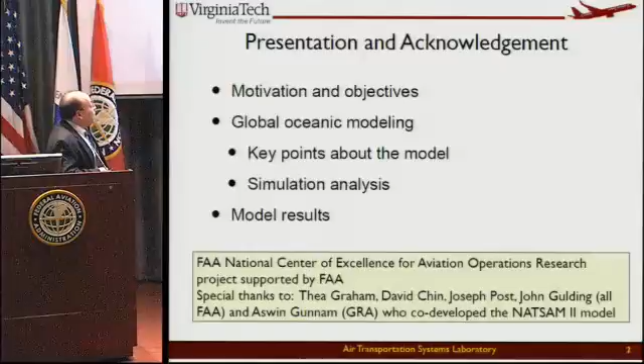So the presentation here covers the motivation, and then we show you some of the simulation results.

As Arnie mentioned, the aviation system is very safe, but there are about 500,000 flights every year, depending on how you count, that cross the oceans, whether Atlantic or Pacific, originating or ending in the US and other parts of the world like South America, Canada, etc. Measuring the benefits of advanced technologies in oceanic airspace is something the FAA is very interested in, as well as other air navigation service providers like NAV Canada, NATS UK, and others. The objectives were to develop a model which really started as a validation of another model, but then the model took an organic form of its own.

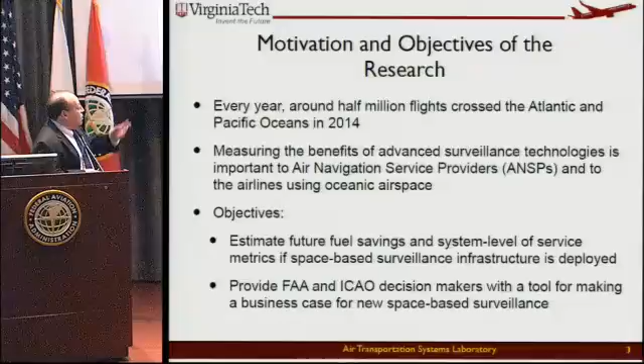The idea is to estimate fuel savings, travel times, and other measures of level of service that we can infer from oceanic capability that will be deployed in the future if more precise navigation and surveillance is implemented. Again, this is a topic that both FAA and ICAO have great interest in.

Here you see this is just for the Atlantic region. These are examples of the number of flights that cross the Atlantic every day in the organized track system - depending on which day you pick and how you count, maybe somewhere between 500 to 600 every day in a 24-hour period. However, there are a lot more flights in the South region which are not flying the organized track system. These are called non-OTS flights in my presentation.

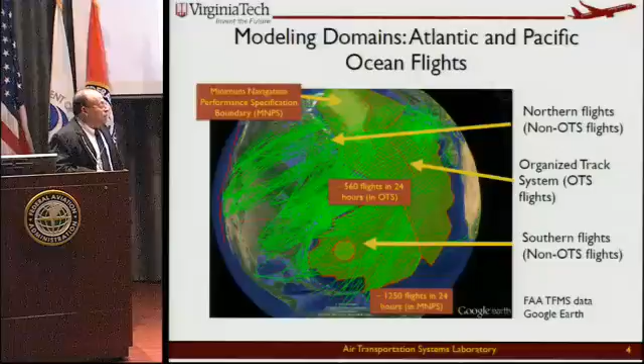Similarly, you have flights from the West Coast to Europe. Those flights typically follow non-OTS routes - they are user-preferred routes, and these are sometimes called random flights. So we are going to describe how we measure the benefits for each one of these types of flights.

These are some of the improvements we can get with better surveillance technology, like space-based ADS-B for example. You can reduce longitudinal separation in-trail inside the OTS. You can also reduce lateral separation between the tracks, and reduce lateral separation for non-OTS flights. With better surveillance, we can allow more planes to execute climbs, which during busy periods right now we don't see a lot of in the OTS.

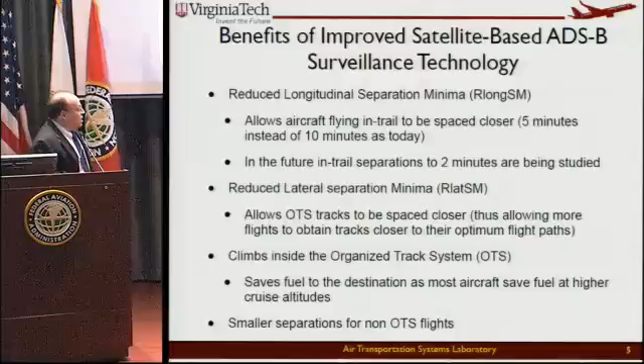The idea was to develop a model fed through real data, like TFMS data, or we can make our own flight plans. Because if you don't have data, or you're predicting the future and want to add 40% more flights than the baseline scenario, we have to predict the future, meaning creating flight tracks or flight plans ourselves. So we have a model able to do both - take TFMS data as well as do its own flight planning - and then inject it into a simulation model.

The simulation model uses the Eurocontrol BADA aircraft performance, tweaked because we have good data that Mr. Heimlich sent us from A4A - great thanks to the A4A folks for providing very nice data. Each box here shown in green happens to be a data input that the model uses in some way. For example, the A4A data is primarily there to calibrate behaviors in takeoff mass across the Atlantic or Pacific for those flights. This model is basically a numerical time-step simulation model, perhaps similar to TAAM or RAMS for those familiar with those.

We have conflict resolution and detection, but the model also has some components. If you look at the very center of this... I was using the pointer in the wrong way, excuse me.

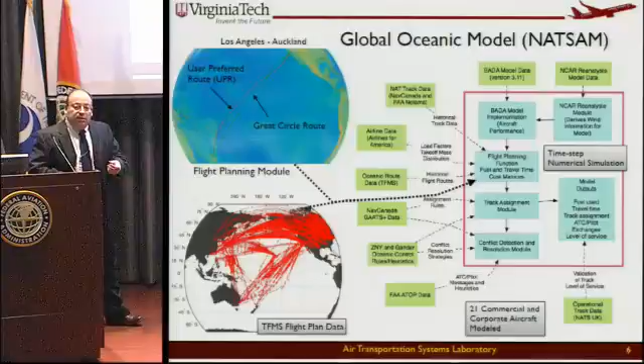So the flight planning function here, under flight planning, the track assignment is actually an optimization algorithm. This is the reason why we decided to develop this almost from scratch, because it's very difficult to do optimizations in existing models like TAAM or RAMS, where you will have to have a bus structure that passes parameters out of the model, do your optimization, and then feed it back. But anyway, let me give you some of the ideas.

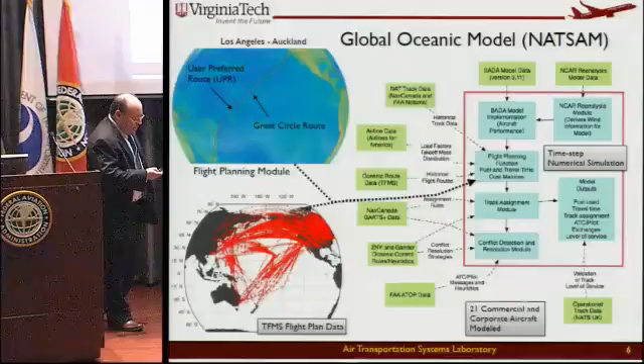So here we have an airplane flying over the ocean. We have some basic differential equations of motion for this aircraft, and we sample the position of the plane every 5 seconds. So every 5 seconds we recompute the fuel flow, put it back into these equations of motion to recalculate the mass. We also have behaviors in terms of the aerodynamic behavior of the aircraft, and then we can calculate distance, mass, and altitude, which are the state variables in the model.

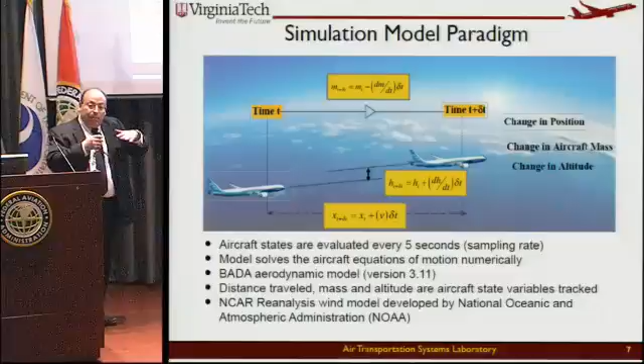Now, of course, if this vehicle encounters another vehicle and you have to separate it, then we obviously trigger some action, and you will see that we have some rules for that.

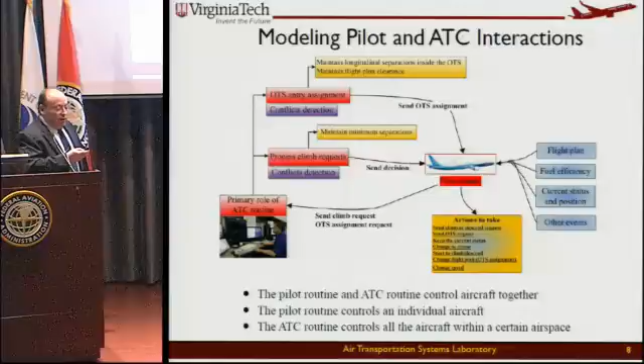We also have this model communicating behaviors between pilots and controllers, because remember, in oceanic areas right now there is a lot of data link communication that goes on. So part of the analysis we want to do is keep track of how many messages are being sent from the plane to the air traffic control people, and that way we can capture some perhaps precursor measures of workload, or, for example, count how many times the pilot attempted a climb and it was denied, perhaps due to traffic considerations and so on. So we have all that dynamic capture there.

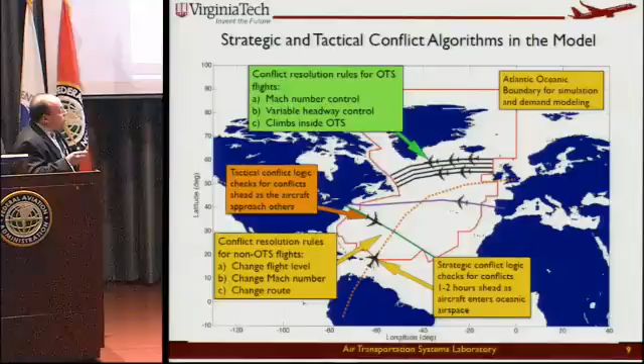Now, these are some of the things we have to explain, because the model really has two separate behaviors. The behavior in the organized track system is very different than elsewhere, because in the OTS you have a very rigid way of doing business. However, we use basically Mach number control and variable headway control rules, depending on your target Mach numbers, and we have to make sure those separations are going to be good. On the other hand, for non-OTS flights, we have more freedom, more degrees of freedom, and we can change flight level, change the Mach number, or detour the plane.

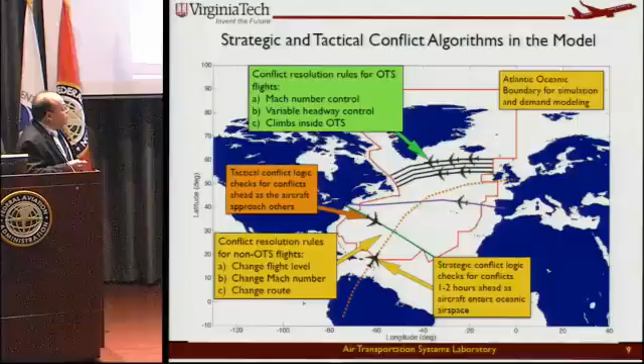Notice that we also have two conflict rules. One is strategic. As soon as the plane enters the oceanic area, as shown here for this flight that goes from Quito to London Heathrow Airport, immediately the controllers in the Oceanic Center, in this case in New York, will start querying this flight against other flights to determine if there's going to be a conflict ahead. Typically, sometimes those conflicts can be detected by the system 1 or even 2 hours ahead of time. However, because wind conditions are uncertain, as the vehicle approaches another vehicle, you have to trigger a tactical conflict and resolution algorithm. So in this model, we have both of these.

Let me show you some of the things that we produce. This model produces things like fuel consumption and travel time, since these are two key metrics. But we also predict what percent of the flights are going to be accommodated in the track and the cruise flight level that they are requesting in the organized track system. For the non-OTS flights, we can also find what percent of the flights get affected by these conflict resolutions, whether they are tactical or strategic.

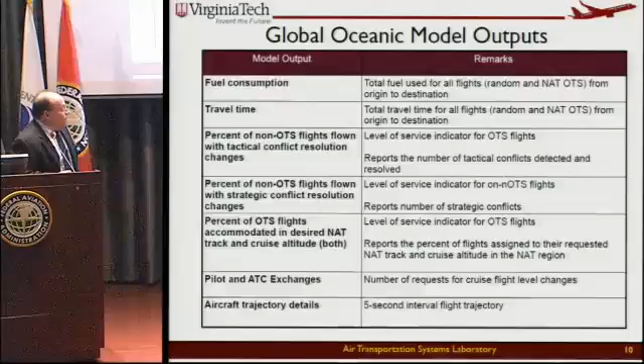So again, these are measures of performance of the system, is that right? So we want to do that. And of course, we can also track the number of pilot-ATC exchanges. For example, when the pilot requests a climb, and whether that climb is denied, we obviously log that in. And of course, you also get a flight trajectory that can be as detailed as every 5 seconds if you want it, perhaps for a safety analysis later on.

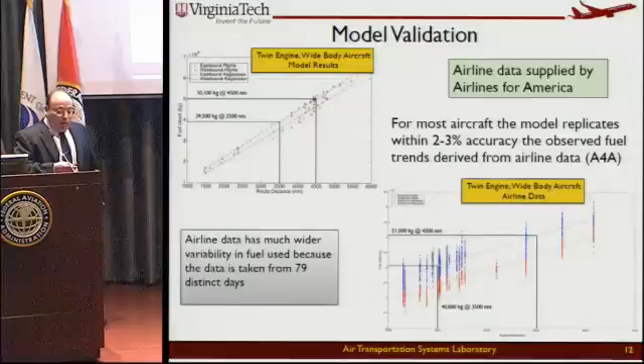Is this model really telling us the truth? Mr. Heimlich from A4A gave us very nice data that we can use to compare. Remember, we are still subject to the BADA model in terms of accuracy. However, it's nice to see, for example, when we model this aircraft—it remains unnamed, but you probably can make up who this airplane is, a twin-engine wide-body aircraft—this basically shows me the behavior of eastbound and westbound flights, and this is the A4A data. In general, we are within 2 to 3% of what A4A statistics show for those OD pairs that we collected. So that's good news.

Let me show you some preliminary results of these. I would put the caveat here that these are still preliminary because we continue tweaking this model. These are some of the assumptions that we made.

For example, in these results I'm going to present, we model both the Atlantic and Pacific Ocean flights. We are basically modeling 21 distinct aircraft, including new generation airplanes like the Dreamliner and the 747-8. We had 3 days of demand that we took from TFMS and injected into the model. We're using 2,000-foot hemispherical rules.

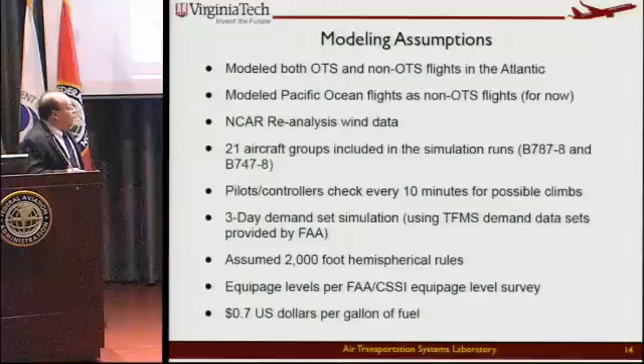I don't show the results in terms of dollars, but in terms of millions of kilograms of fuel saved every year. There's also some equipage level data here that was conducted by a survey done by FAA and CSSI some years ago, and I understand that is also being updated.

So here are some of the early results. This is for the Atlantic side. You see here the model—we ran the model for 3 days. That implies about 2,349 flights, including New York oceanic flights and also the flights inside the WATRS area. We basically see here the breakdown between tactical conflicts and strategic conflicts.

Right now, the model seems to be resolving a lot of these strategically, and again we have to go back to the actual data from ATOP to find out whether or not that is true. We visited New York Center, and we found that they are very strategic—they try to solve these conflicts very, very early on so that they don't have to worry about it for the next half hour or hour. So this is what the model right now is showing us.

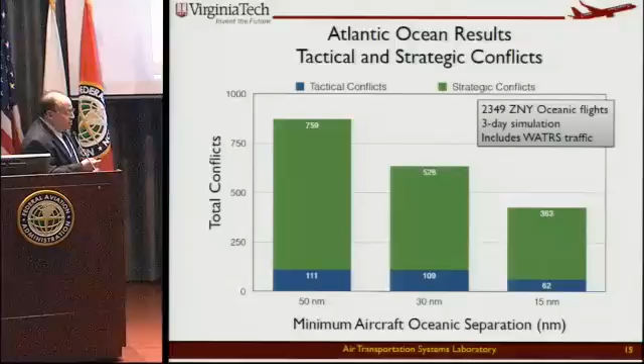Now, in terms of the tactical things that happen when you have to start making minute adjustments to Mach number, for example to deconflict 2 planes that are nearby, these are some of the results we see. Here we show 3 scenarios. Right now we assume the baseline: if you are not equipped in the ocean, you're going to be separated to a minimum of 50 nautical miles. If you are equipped, 2 airplanes equipped today could be as low as 30 miles.

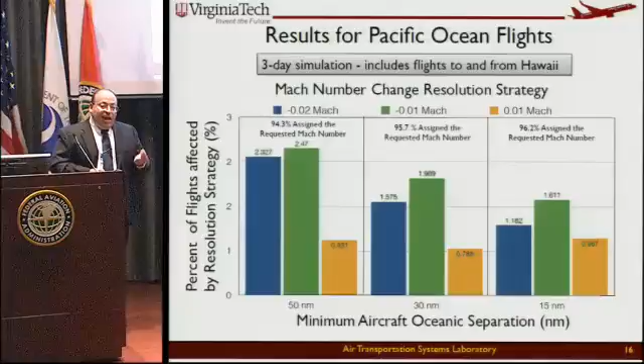Specifically, you want to take a look at these blue lines or the blue trend, because that happens to be the high—we changed the Mach number up to Mach 0.02 for most of these flights, that's the upper limit we put. If that resolution strategy doesn't work, then we have to do a lateral adjustment probably, because that would be more appropriate. A lot of these behaviors have to be calibrated against real rules that oceanic controllers will use. We visited the New York Center and Oakland Center to learn from them.

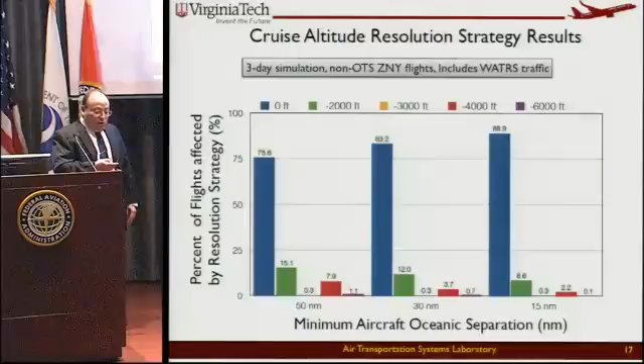These are examples of tactical resolutions, but here we're looking at changes in cruise altitude. In the baseline scenario, 76% of flights were able to stay in the altitude they requested. As the separation criteria is reduced, up to 88.9% of flights will actually stay in their flight level. This is a big improvement, and while it doesn't seem like much, in terms of fuel consumption it really pays off.

So here are the numbers, again preliminary. Looking at Atlantic flights, if we go from 50 nautical miles, the baseline separation, to 30, we get about 91 kilograms of fuel saved in the Atlantic, 81 in the Pacific. These numbers aren't exactly twice each other because these conflicts are fairly random. For Pacific flights, which are fairly long, you get a gain of about 173 kilos, that's about 400 pounds per flight.

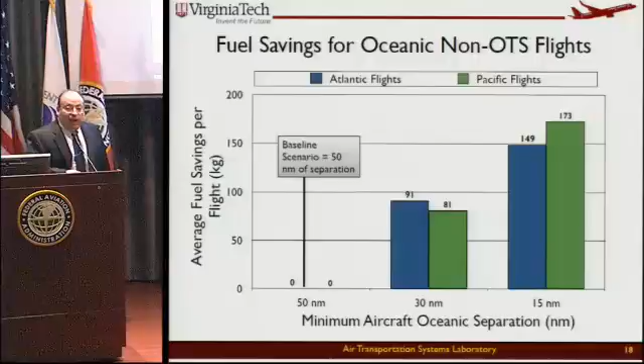Now the question is, how much is that? These are greenhouse gases, by the way, that we calculate as a multiplier of the fuel. Now, what happens in the OTS?

In the OTS, we examine the situation by looking at these headways between flights. When there is an opening like shown here, if there is a flight below that wants to climb, that flight is able to climb if it satisfies certain dynamic rules.

Another reason this model is slightly different than TAAM or RAMS is that every time a cruise flight level change is made, we recompute the fuel burn all the way to the destination, so we have a pseudo optimization for every flight. That takes a toll. This model takes about 6 hours to run on an i7 machine right now with about 2,300 flights over 3 days, which gives you an idea of the level of computation involved.

In the OTS, we factor that if we could reduce the separation criteria to 2 minutes in trail, which is a very aggressive target, allowing climbs in the OTS, we could see a benefit of about 158 kilograms.

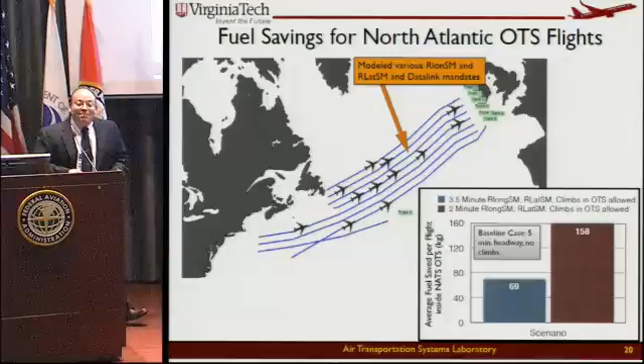By the way, I put everything in metric here because I was told, even when I was an undergraduate, that FAA was going to go metric 25 years ago. So I'm trying to contribute a little bit to that effect. We'll see.

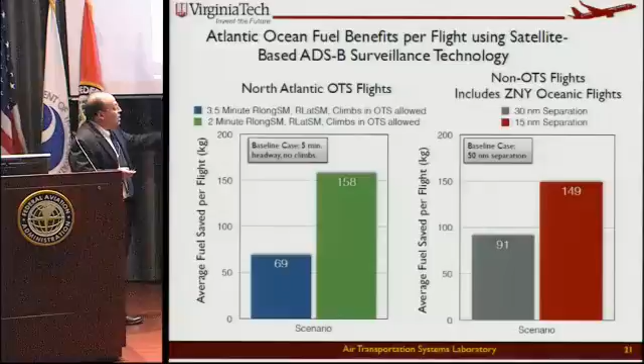These are examples of the comparison between OTS versus non-OTS flights, and you can see the numbers are quite comparable. Going to 15 nautical mile separation, 2 minutes of reduced longitudinal separation is almost equivalent to 15 nautical miles, depending on how fast you fly, but at Mach 0.8 it's probably around 16 nautical miles in trail. So they're quite equivalent.

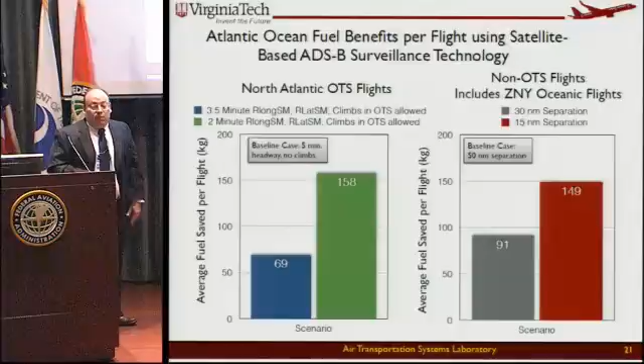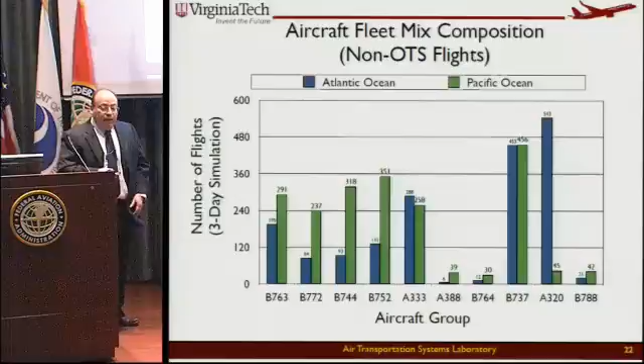This number for the OTS flights includes savings achieved through the climbing procedure inside the OTS. For the numerical simulation, this is our fleet mix, showing the types of aircraft considered. The reason you see large numbers of 737s and Airbus A320s is because all of these belong in the WATRS area, and remember we're also modeling that specific area in the Atlantic called WATRS.

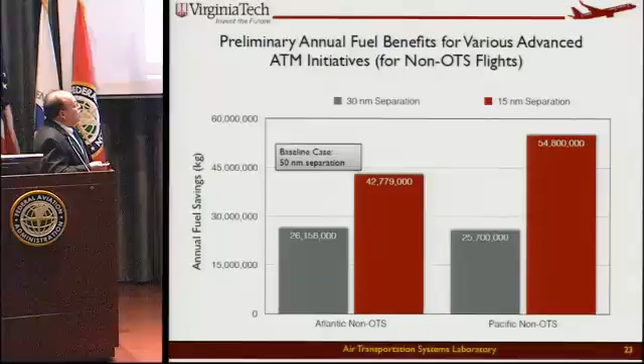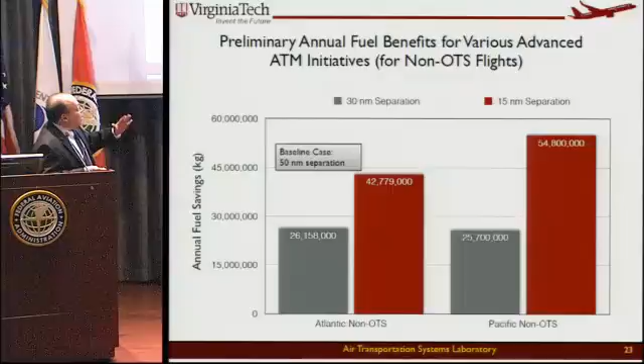When you extrapolate these numbers and try to annualize the benefit, it's somewhere between 43 to 55 million kilograms annually, if you go from the baseline of 50 nautical miles to 30, and then on to 15. These numbers are still preliminary, but that gives you a ballpark of what the model is capturing.

As a conclusion, I'd like to echo what Mike Ball said this morning: it's always a pleasure to work with hardworking and intelligent students at our universities. That's probably one of the conclusions I didn't put here, but I should have.

We have developed a simulation model that can estimate these benefits. The hope is that this model can be used by agencies or organizations like FAA and ICAO for decision-making in the future, as you make these hard decisions about whether to invest in that technology or not.

And again, I just put here with the caveat that these are still preliminary results. For Atlantic flights, we're looking at maybe 150 kilograms per flight on both areas, the non-OTS as well as the OTS, so almost very similar numbers. For the Pacific Ocean flights, where one would expect a lot more benefits, nevertheless it turns out there's a lot less density of traffic and fewer conflicts that occur already in the Pacific today.

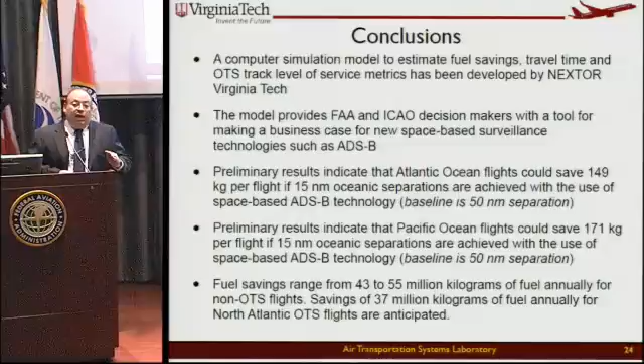So anyway, the benefits are about 171 kilos. When you extrapolate these numbers to an annualized basis, you get numbers on the order of 43 to 55 million kilograms. For the OTS, that is equivalent to about 37 million kilograms, because remember, in the OTS we only get about 50% of the total traffic that goes across the Atlantic. In fact, more recent numbers point out that fewer than 50% of the flights are actually using the organized track system.

So this was my last slide. I have a few backup slides, but since I finished early, Mike, you didn't give me the 5-minute warning, so that means I'm early, and you are free to ask me any questions.

So far, it's been a great event to be here and speaking. My only complaint so far is the relative height of this podium, which not only do I not like when I'm up here, but sitting where I am down there, I haven't even been able to see anyone, only Mike Ball. But other than that, it's a pleasure.

And really, like everyone has been saying, I want to make my special gratitude on behalf of my Purdue colleagues who have worked on NEXTOR 2 projects, that we're very pleased to be part of this family. And I use that term because since we were able to join, it has been a very family-like atmosphere. We've really enjoyed it.

Besides myself, Professor Landry and Dengfeng Sun and Marais, Crossley, et cetera, have sort of been involved, and it's really, starting with Dave Chin, I really appreciate that support and that leadership at Dave's level for making that atmosphere, and then to Mike for the herding of cats problem that he's done masterfully.

So my presentation today is hopefully going to be, by design, very synergistic with what you just heard from Tony. Let me go to the next slide here.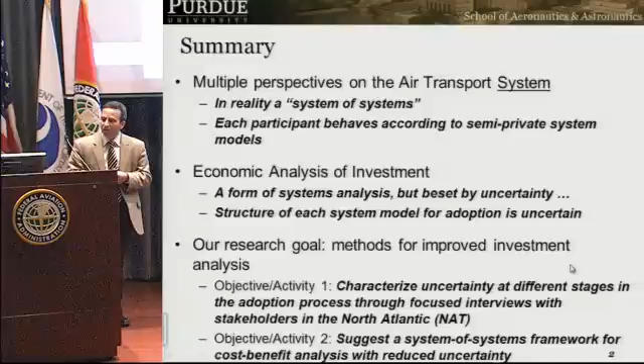So really that's our objective there, and it has dovetailed nicely with some PhD work that the student working on this, Ms. Lauren Bowers, has had in mind. The opportunity, and I give thanks to Thea Graham for making this possible, was to focus on the North Atlantic as the perfect case study to look at these issues. Our goal is to say, given this North Atlantic case study and the notion of uncertainty and the structural models of how organizations respond to new opportunities and new technologies, how can we suggest a way to do the economic cost-benefit analysis better into the future? So that's kind of the bottom line up front.

So this is where I pound you over the head with what I think we all realize.

There's a reason that this slide is complicated, because the air transportation system is truly dramatically difficult. The way we use this kind of system of systems framework is to try to be very rigorous up front, using this matrix of all the things involved—the physical hardware, the resources, as well as the economics, operations, and policies that motivate the organizations operating or doing something with the equipment.

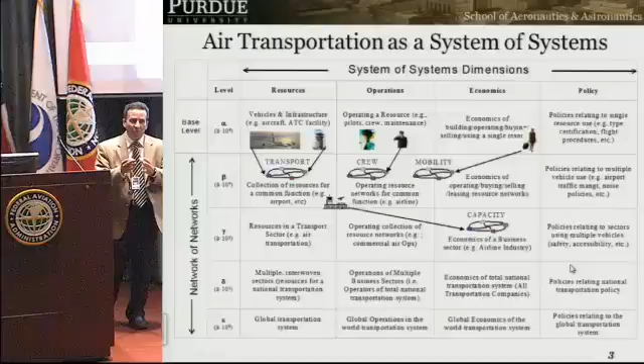So if I were to give you a capsule of what we mean by system of systems, it's a collection of systems brought together for some unique purpose, but each has some operational and managerial independence. These systems are interacting, but it's not like molecules interacting in your chair, whose sole purpose is supporting you comfortably while you nap during my presentation. Each entity has its own objectives, so you have to look at the interplay and interdependencies between them.

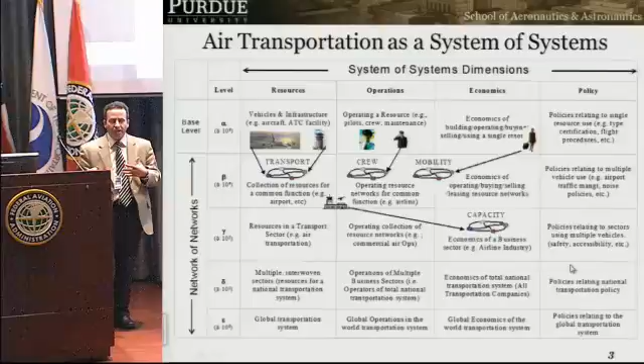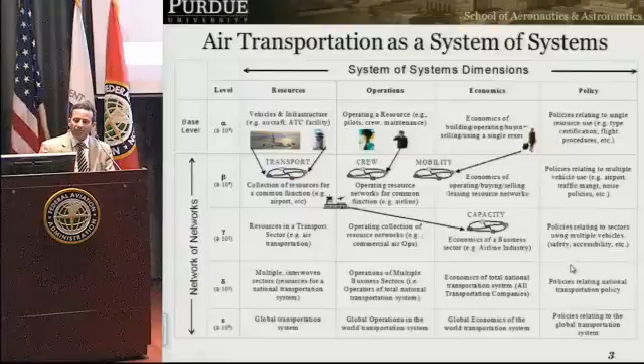I have to say the early work done by NEXTOR on CDM was really groundbreaking in many ways, factoring in that notion of how you take objective functions and constraints from these multiple players and try to make them work together. So this is the backdrop for how we're looking at this specific case of operational improvements and their adoption in the North Atlantic, and I think it's been a good context.

Moving forward to that topic specifically, we've had some nice benefit looking back at work done by students and faculty involved in NEXTOR who are now off in great places like the FAA. Ms. Campus here put together this notional diagram of stakeholders in the NAT, and you can see circled the ones we're focusing on—the air navigation service providers and commercial operators—but clearly there are others at play here.

At some point you have to make difficult choices about where to draw your boundaries in terms of models, either for the performance assessments that you heard Tony talk about, or these behavioral issues among the various players. So for the relatively modest scope of our project, we're focusing on these two.

Another great reason this is a good example problem: there's extreme diversity and a relatively large number of players in this particular airspace. You see here a list of what I think is a complete list of all the ANSPs involved in the North Atlantic, and it's not just the high number, but the diversity.

By diversity—we don't have a lot of data on the features because I ran out of time—but you can imagine that each of these entities, especially if operated as a public or private entity, have very different structural models of how they make decisions on investment, technology rollout, and the operations and execution of air traffic services. This is something we've tried to pay attention to. As you'll see shortly, we're conducting a series of focused interviews, trying to get a spectrum of each of these kinds of players on the ANSP side.

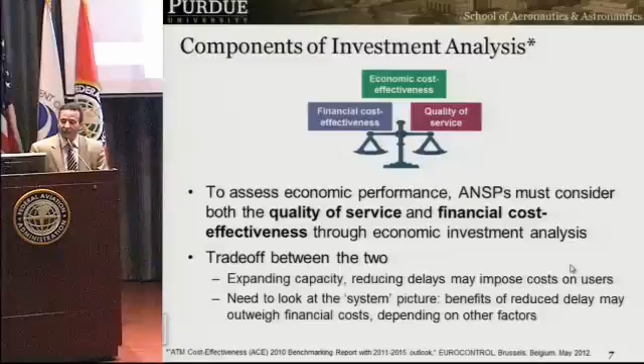And again, you saw even in Tony's presentation and some of the questions you all raised for Tony, it really depends, as we're going to see, on how the operators perceive the predictability of the benefits they could obtain, as well as the magnitude of those benefits, in terms of whether they're open to accepting new operational capabilities. This is the basic notion of what we're trying to improve by using this information we're gathering to reduce the uncertainty in those behaviors.

A little bit more deeply, I think most of you know, at least in a cursory fashion, that the purpose of this economic analysis of investment is to say, from whatever stakeholder perspective, is something worth achieving if there's a particular objective, and if there are several alternative methods of achieving an objective, which of those is best. The first probably depends on the second and vice versa, but these are the basic questions that benefit-to-cost analysis is concerned with.

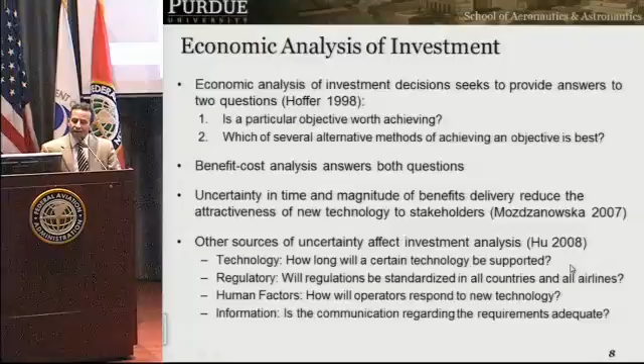Now, from some of the literature we've already seen, there's a clear recognition that uncertainty in the time and magnitude of benefits is important to stakeholders. I don't think anyone had too much doubt about that, but we're trying to understand the next layer below, what are some of the specific features for different stakeholders that we can use to characterize that uncertainty. On the last bullet, where you see those various sources of uncertainty in investment analysis, we're especially focusing in our study on human factors, how will operators respond, not only in the cockpit, but the organizations themselves, as well as the information perspective of what's being communicated to whom and when, both on the tactical level and to some extent the strategic level.

And that's probably a good time for me to mention that one of the great parts of kicking off this project is that last fall there was a meeting sponsored by NAV Canada up in Montreal where they brought together all of the operators and most all of the ANSPs in the NAT, and there was a workshop in which they talked through these issues, including space-based ADS-B, the concept and availability of that and the perceived benefits. Essentially, in my opinion, in layman's terms, especially NAV Canada, they were curious why the current ability in the current system that offers increasingly more available flight changes in terms of speed and altitude were not being accepted by the airlines. They were very perplexed by that.

We were sitting there listening very carefully to some of the reasons that were expressed, and our interviews, which we then did subsequently, really characterized those more specifically and found some differences between even passenger-carrying airlines in how they perceive those benefits.

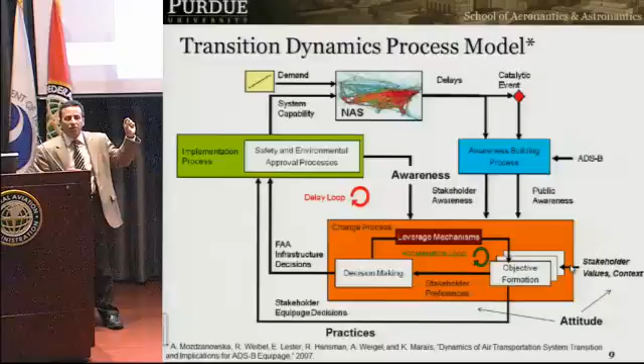So the long-term perspective of this work we're doing, to try to characterize these models and the uncertainty in the models of each of the stakeholders, could eventually be placed in something like this, which is a conceptual model. It's really important for showing the flow of information and how each of the stakeholders would essentially have a version of this transition dynamics process.

A bunch of people contributed to this, and the nice thing is that many of those people have gone to different places after their MIT work, one of them at Purdue, Dr. Marais. So I guess there must be an animation here.

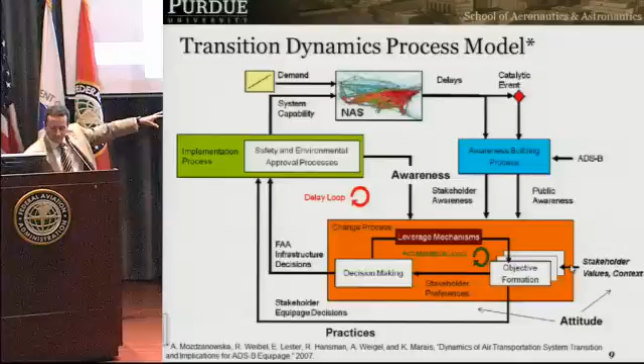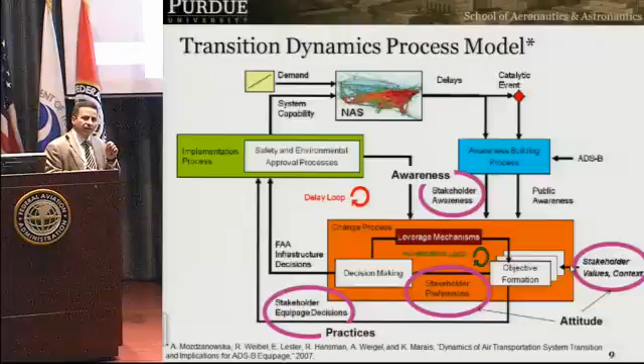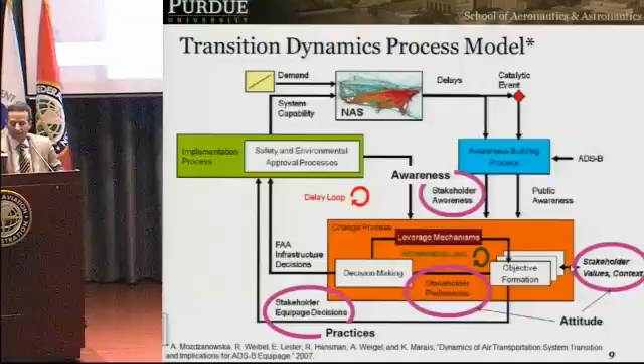Yes. Some of the particular things I've circled in purple are the areas our student has focused on, the specific categories of questions in the focus surveys conducted based on literature she's found, in terms of: are people aware of the operational improvements and technology available? What are their attitudes towards adoption, especially regarding cost and benefit? And then what are the current practices that may accelerate or inhibit adoption, given the cost being lower than the benefits, or the balance being appropriate?

So the next part of the presentation will give you a capsule of the in-work preliminary results, as Tony also alluded to, of where we are. So we have these categories of knowledge and awareness, attitude, and practices. Given those, the topics of questioning within those categories have to do with the ability for speed and altitude changes to be provided to flights in the North Atlantic tracks, in the organized tracks.

How and when are ANSPs granting those, and how and when are airlines or operators requesting and accepting those? And then the second set of questions had to do with the longer term - if something like space-based ADS-B were to come into fruition, providing increased surveillance which would give us reduced minima, how would they balance and prioritize the benefits they could get from those things Tony showed, versus the cost of both equipage and use of that service.

We have some open-ended questions at the end letting them say, forgetting about what we've asked, what kinds of flexibility would they like to see in the North Atlantic? Part of the reason to have those questions is to support some collaborative work we're doing with MIT and Professor Hansman on that topic.

So here we are so far. As we've been doing anytime we've been presenting this, part of this is showing you what we've done so far, and part of this is twisting arms for people in this room to be interviewed, if appropriate. So we've conducted so far 10 interviews: 5 individuals from operators, 4 from 2 ANSPs, and 1 from a trade association. We're continuing to recruit from pools of candidates.

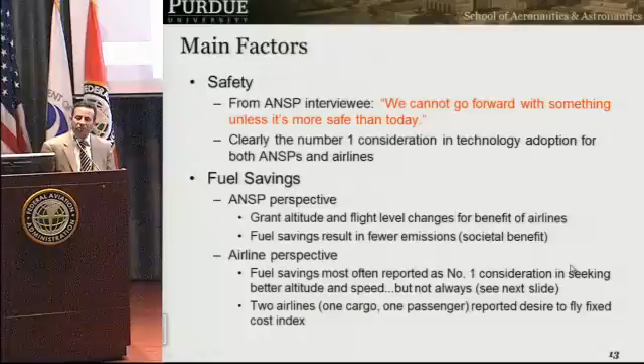Okay, so 2 chunks of results so far, preliminary. One, on that notion of - in the current system, there's an increasing availability of speed and altitude changes to improve routing. So first of all, across all the respondents so far, some main factors have come up that shouldn't surprise any of you. Consistent with the very compelling statistics and commentary that Arnie provided about the safety of the system - that remains the #1 priority. We cannot go forward with something unless it's more safe than today. That was a consistent finding across all the interviews to date.

In terms of fuel savings, we see that certainly the ANSPs involved in the NAT - some more aggressively than others - have developed the capability to provide these altitude, flight level, and speed changes. Because they feel it's both the benefit of the carriers as well as fuel savings and reduced emissions for societal benefit. So that's clearly at the top of their list as a service provider.

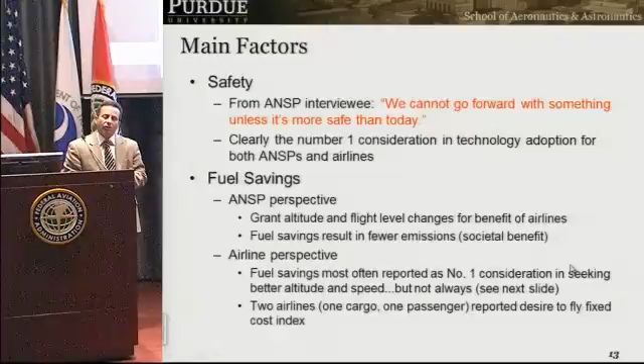The airline perspective - you'll see we clearly see fuel savings reported as the #1 consideration. My perspective, even after this big meeting up at NAV Canada, is I don't think all of the carriers we've talked to so far know the relative magnitudes that Tony has talked about. That gets to this notion of communication, which is very important in these transition processes - I think we have evidence here it's still probably quite a ways off in terms of where it can be for these particular advantages.

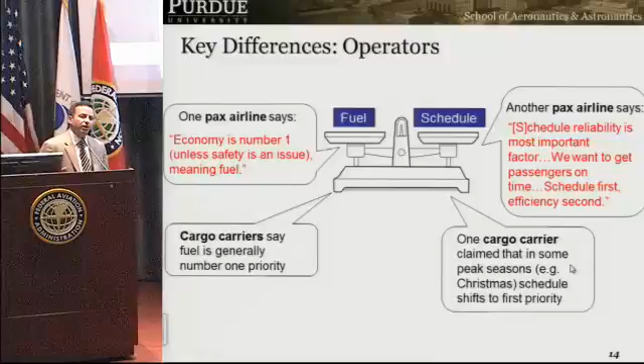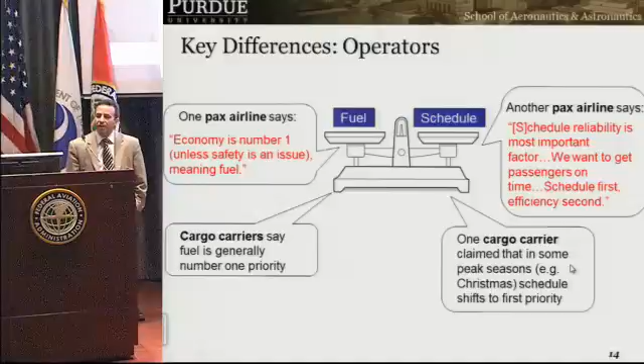Okay, so just a few slides to give you some pictures instead of just words, although we still have the quote prominently here. In terms of operators, fuel economy is #1 for most or many of them. But we did see one of the air carriers as well as cargo carriers saying that schedule reliability is actually a more important factor most often for them - to get the passengers where they want to go, to get the connections appropriately achieved. So this was not a blanket rote fuel perspective - there was actually a perspective that said schedule can often be more important in terms of priorities.

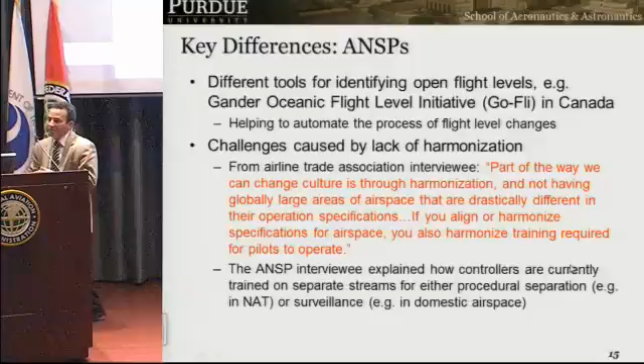The ANSPs - in terms of key differences there, clearly we've seen some evidence that some of the ANSPs are more capable, more aggressive, and more advanced in offering these flight level changes in the NAT. As Tony mentioned, this is a critical thing we detected from the carriers: if you can only get reliable changes when you need them for only part of the flight because of different ANSP capabilities, this is an issue, and some of the benefits may be mitigated. That's the long red quote in a nutshell - harmonization is needed so we can make sure these are consistent offerings across the North Atlantic tracks.

So another thing besides similarities and differences among the respondents in the different types, we've looked at interdependencies, sort of between them, and this sometimes gets to the tactical level as shown here. My perspective is that some of the ANSPs at this meeting we went to at NAV Canada felt, hey, we've got these offerings to you, and why aren't the airlines and carriers taking them as much as possible?

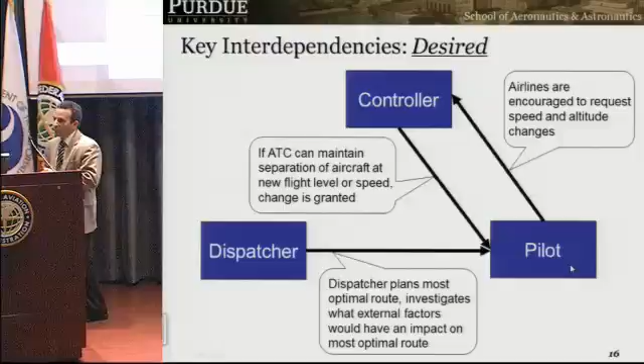Certainly there's been a significant uptake in these. It's not like there's no adoption of these possibilities. And again, in the near term, with the developments that have been made, it's been relatively only a change in the operations for the airline. It hasn't been the result of a new equipage, other than having to be FANS 1A equipped, et cetera. So airlines are encouraged to request these changes.

If ATC can maintain the separation, the new flight level or speed is granted, and this should happen on a regular and almost always basis. The dispatcher plans the most optimal routes, and certainly, as you're going to see in a second, the reality of the real world takes place with the dispatcher, especially on the confidence and external factors related to this decision.

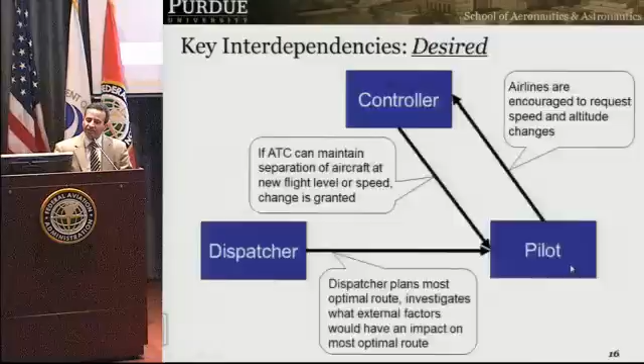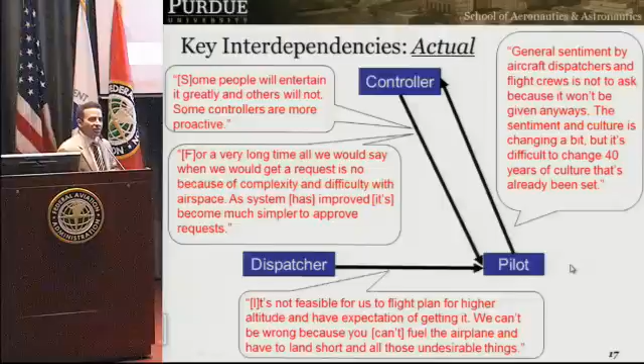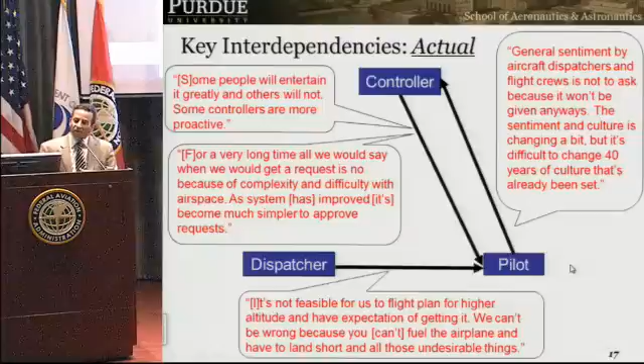So they're well trained, but also used to the environment they've been flying in. And so there's been an issue of changing the culture, and even if you recognize you need to change the culture, doing that uniformly across an entire carrier and set of pilots takes some time to build confidence that you're going to be granted what you request. From the ATC and ANSP side, they're finding that some are entertaining these greatly while others are not, and they're trying to figure out how to get the others who are not to be more proactive in accepting and requesting those. They recognize that for a long time when they were asked for these changes, they were giving the answer of no. So there's this transition process that takes some time.

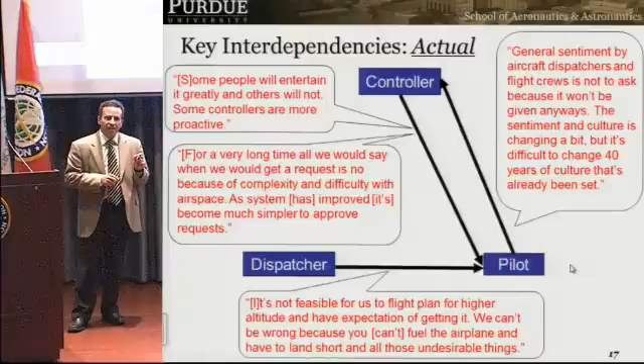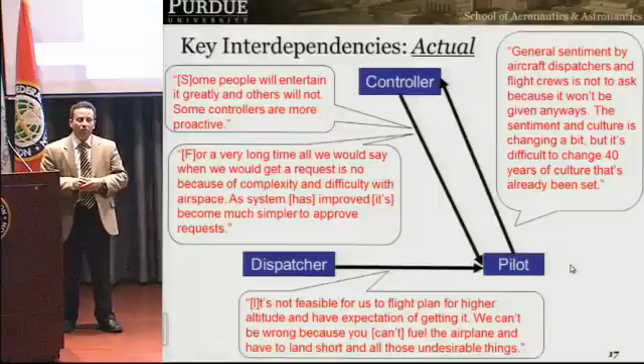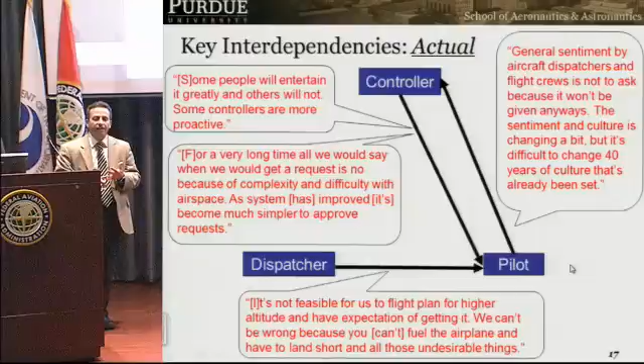And then finally, the key point on the dispatch side that came up again in Tony's talk is—and we have some specific interview data on this that I don't have time to go into—how much fuel is loaded on the aircraft is not an insignificant decision to make. So getting the expected changes you need in terms of your flight profile 85% of the time may not be enough for you to reduce that load of fuel, which gets the double effect, as Mike mentioned, of not only reducing the fuel burn, but reducing the weight of the aircraft. This is probably one of the crux issues we found as part of this difficult transition process. Education, communication, training, and confidence building can help, but it doesn't seem to be there yet at the threshold level.

So quickly wrapping up a little bit, we also asked questions about space-based ADS-B as, again, a future capability that would provide even better surveillance and reduce minima and all the benefits that Tony talked about. But it's a little bit farther out. And it's also complicated by this system effect where there's a private operator that's going to be offering the service. Each of the ANSPs may have different motivations and different perceived values to their customers who fly in their airspace for this increased capability.

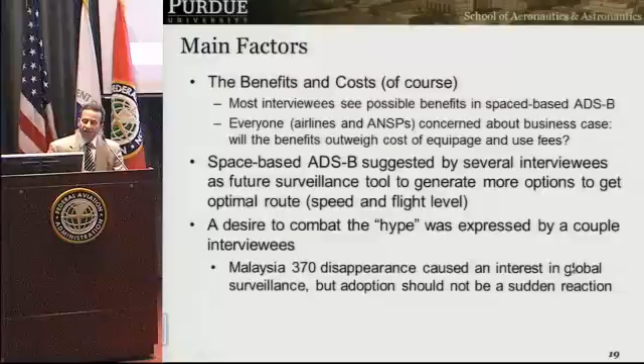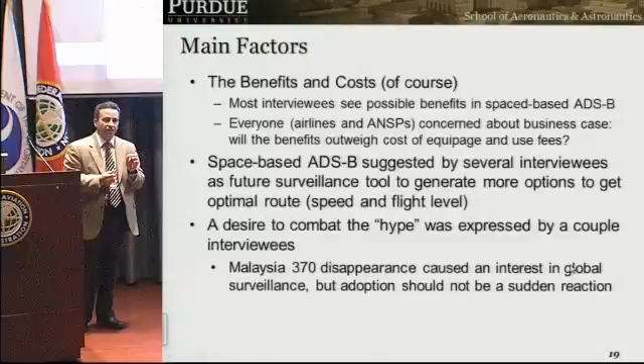And so all of that is playing out in these assessments of benefits and costs. We've really found that by actually talking to the human beings representing their organizations, we're getting some nice perspectives on where they might be thinking about this problem. We should probably then generate some case studies and scenarios for Tony to run through the model to experiment with what those perspectives would produce. I think that would be something good going forward.

In terms of the operators' key differences, clearly some of them are concerned about the weight-based charges and associated fees that would be placing burdens on certain flights. One of the cargo operators talked about the fact that they're flying against the flow of traffic normally in the NAT, and how does that affect what they're going to be offered or what improvements they can achieve.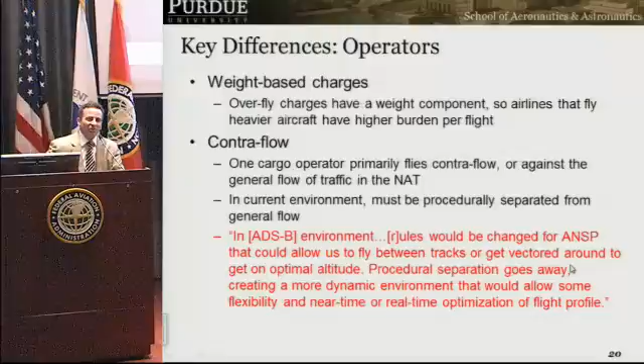The quote there is just another long quote talking about some of the benefits of the procedural separation going away and creating a more dynamic environment. I think this was a positive, but certainly some people are often less comfortable with a more dynamic environment. So that's something that has to come into play.

This was very interesting in terms of ANSP's perspectives. As I mentioned, we saw some differences. Of course, they're organizationally structured differently, so it should be no surprise. They do obviously see some potential benefits from the ability of space-based ADS-B to provide this increased coverage and essentially broaden the amount of traffic. But we saw things like, how many times is there a flight going from, say, Iceland to Anchorage that doesn't get the desired speed and altitude changes? Almost never. So what's the business case for those particular operators and services in terms of something new?

And then we got a lot of questions from almost every side about what will really be the cost structure associated with space-based ADS-B, and how will it be priced, and how much can we realize - how much do we have to pay a premium for capability that we may not actually need in terms of frequency and some of the separation minima that Tony talked about.

I'll quickly cover interdependency - this actually was interesting also. We focused on talking about the NAT, but many operators especially identified that if they're getting better service and the changes and flexibility they want in the NAT, transitioning to then domestic airspaces, if that's not in tune with and commensurate with that planning and process, then we potentially lose many of the benefits that could be achieved.

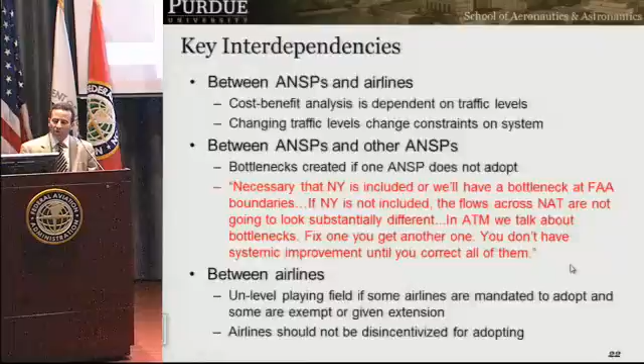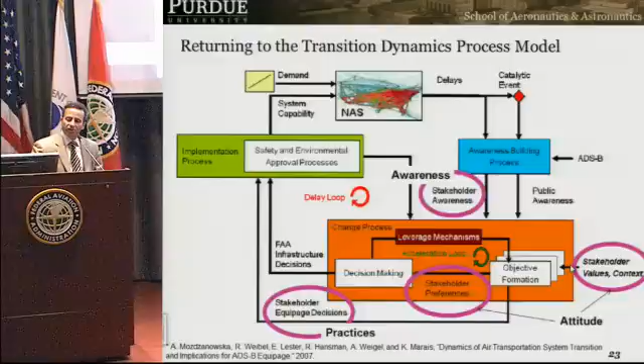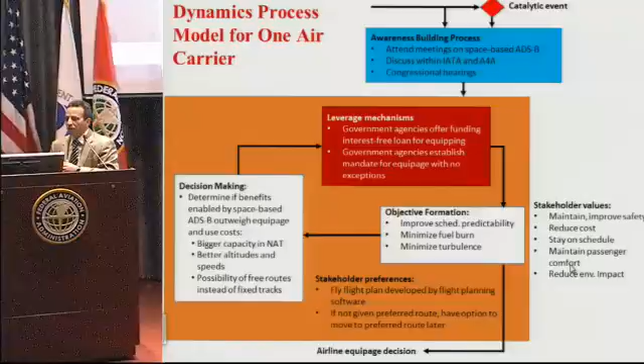So again, returning - what we plan to do is take some of these pieces of information for individual stakeholders, differences and similarities, and this is sort of one blow-up version of that process we saw on the last slide. Thank you, Mike. Where we would basically populate this in a very qualitative way right now because of the kinds of data we're collecting in terms of focus interviews.

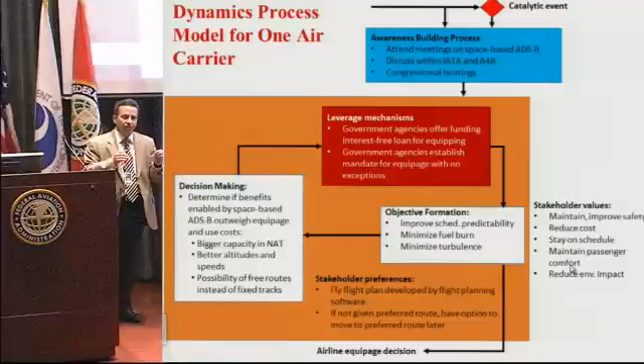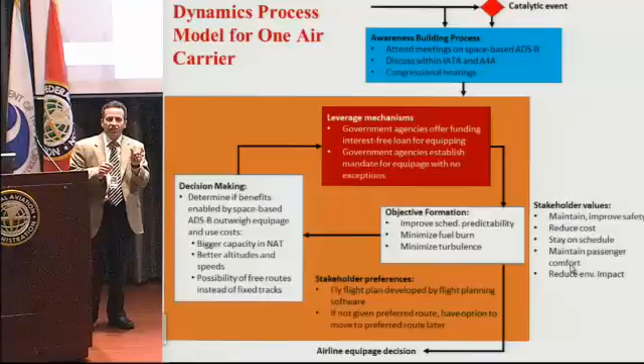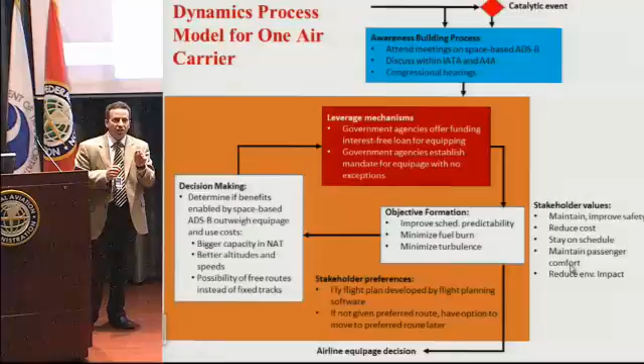We really try to look at these diagrams for each of the stakeholders and ask the questions: how significant are the differences given that one carrier has fuel on top of schedule versus another that has those objectives switched, and how would those objectives actually change the values and decision making, and then ultimately how would this change the ability, in a very simple-minded way, to do the cost-benefit analysis on something like space-based ADS-B with a distribution on some of these behaviors that's a little tighter than what it normally would be, without paying attention to each of the specific types of behaviors in each of these stakeholders. So that's kind of the big picture goal where this could go and part of our work.

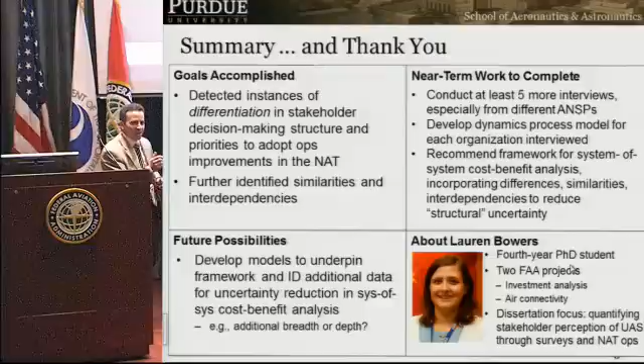And unlike the rest of the people who have, of course, said how valuable our graduate students are, I have a picture of a real one, in case you imagine that they don't exist, even though many of you in the room probably were one.

So Lauren has really benefited from this project, and she's kind of rolling it up into her dissertation, which has a second side looking at the broader issue of stakeholder perceptions of UAS, which I know is of interest, as the administrator said. But really, she's done a good job of balancing this work and some work we're doing also for the FAA through NEXTOR on air connectivity. And we hope we're going to provide a very solid recommendation for a framework for this uncertainty reduction in the cost-benefit analysis and see where it leads from there.

So that's my takeaway slide. Thank you very much for your time.